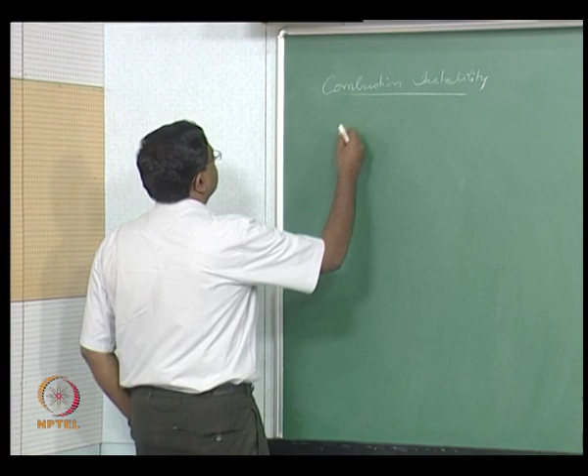The second one is combustor instability, and the third is system instability.

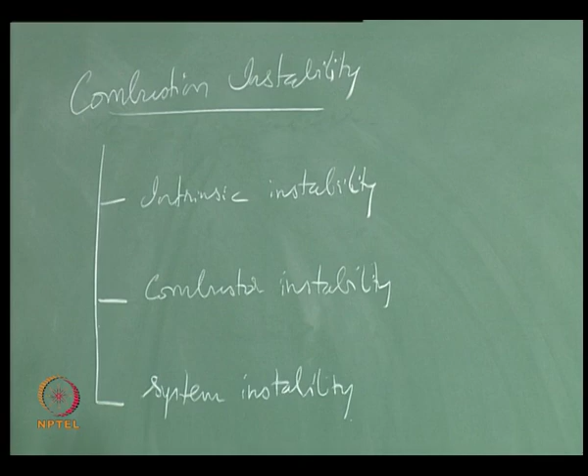We will first briefly look at what these individually mean, and then we will start looking at the details of each of these. But before that, we should also first look at the word instability regardless of combustion.

The idea of instability is not specific to combustion. It's something that comes from what we call perturbation theory. Essentially it's an idea, though of course much more than that - I think it's a much more commonsensical idea. There are lots of things around us which show inherent characteristics of instability.

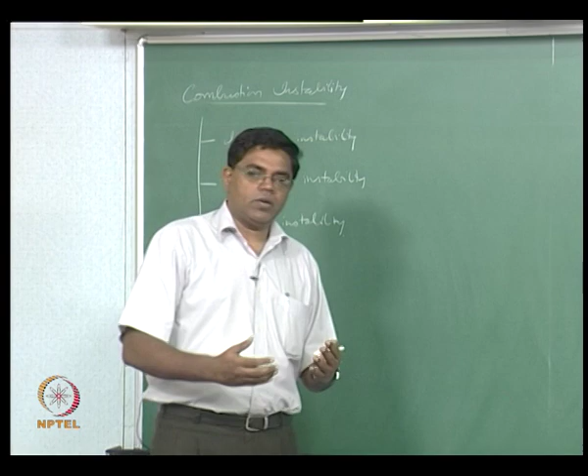Some extreme social examples would be like, for example, if I don't exercise, I grow heavier, and then that makes it more difficult for me to exercise, and then I keep growing heavier - that's an instability. Or another example: if people stop using public transport, then public transport runs in losses, so they run fewer buses, and therefore we go even further away from using public transport, the buses stop running, and so on. So lots of such social or human situations go through what's called instability.

So the basic idea is, if you have a system which we think is in equilibrium, and then we try to make a small perturbation, the question is: does the system come back to the original position, or does it go away from the original position?

There are a few different things that are important here. You could have a dynamic system which is in equilibrium locally, that means at a particular set of parameters. For example, in a flow system the parameter could be Reynolds number. In a combustion system the parameter could be equivalence ratio. So you could be running an engine at a set of conditions like airflow rate and equivalence ratio, pressure, and initial temperature of reactants, and so on.

For this set of conditions you now have some equilibrium, and what we are talking about is perturbing about an equilibrium for this given set of conditions. If you move your set of conditions, you reach a new equilibrium, and that need not necessarily be as stable as the previous one. So equilibrium doesn't necessarily mean stability - you could have an unstable equilibrium or a stable equilibrium.

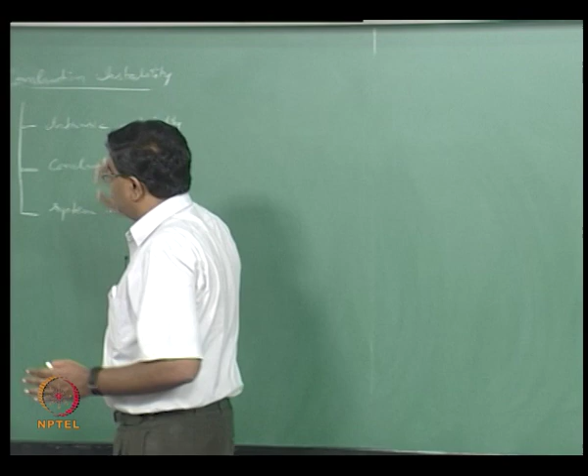Intrinsic instability then is actually an instability where you don't have anything else coupled to the combustion. It's only the combustion itself that is unstable, right? So the flame exhibits instability by itself.

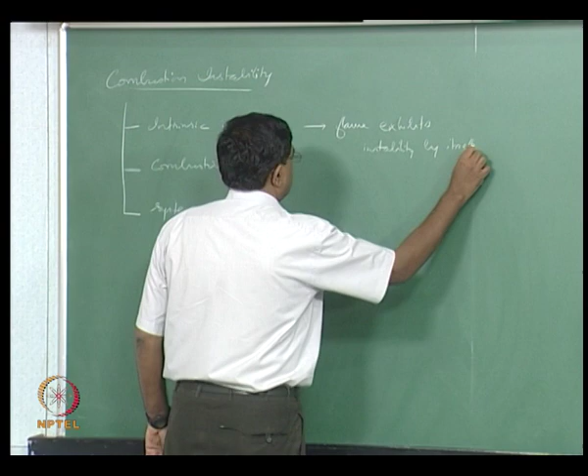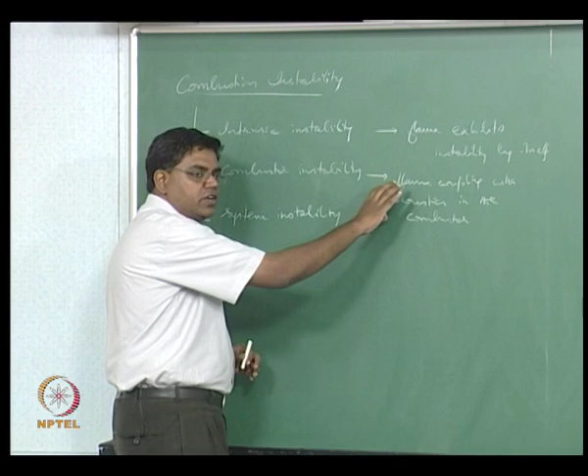A combustor instability, on the other hand, is a system of flame coupling with acoustics in the combustor - this is a flame-acoustic system where you have a feedback loop between the flame and the acoustics in the combustor. We will talk in greater detail about this, but essentially here it's not a standalone combustion that is going unstable, it's combustion coupled with acoustics in the combustion chamber that is going unstable. So that is the combustor instability.

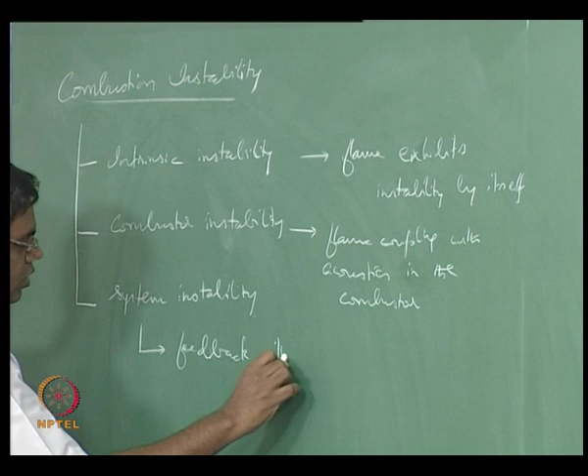The system instability is a feedback with, let's say, fuel supply, air supply, or oxidizer supply, etc. That means it's a bit more specific to how the system is actually configured, which is going to cause this instability. Again, we will talk in greater detail about this.

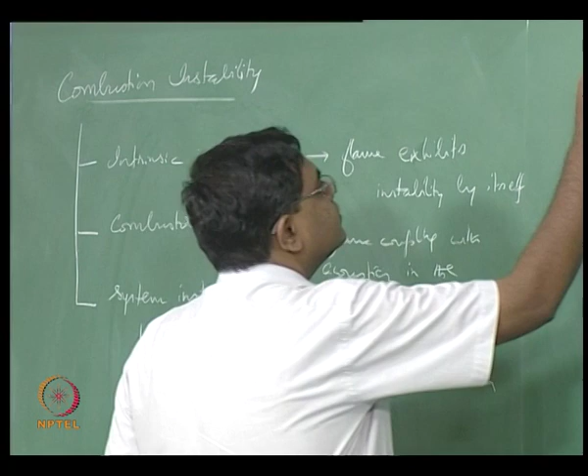So let's first talk about the intrinsic instability here. We shall talk about Premix Flames - or I should say Premixed Flames. I shouldn't say plain Premixed Flames, because that's the point of contention as far as the instability is concerned.

Let's look at Premixed Flames. We have talked about the issues involved here. We could talk about two things: one is the thermal diffusive instability, and the other one is the Darrieus-Landau instability.

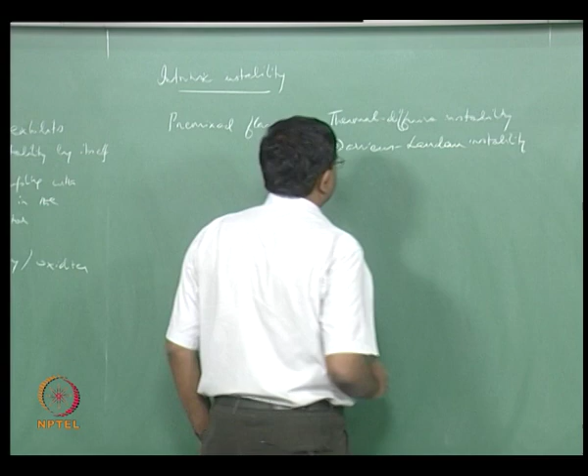We have discussed this previously when talking about corrections to the laminar flame speed, specifically the effects of flame curvature and flow divergence.

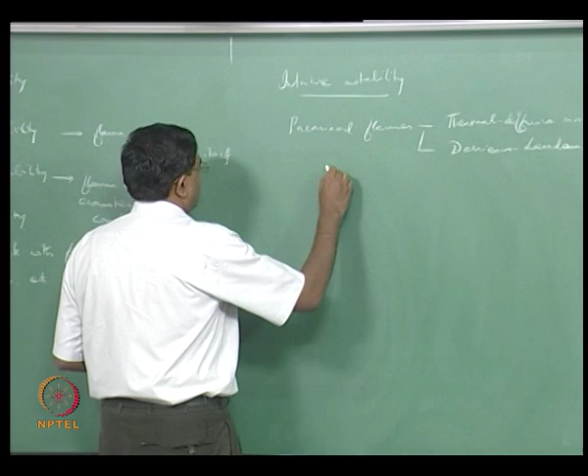Suppose you have a planar flame and then perturb it. We have the situation where heat is going radially outward in a flame that is curved concave relative to the upstream reactants. The flow is going from left to right, and in this case the heat is converging.

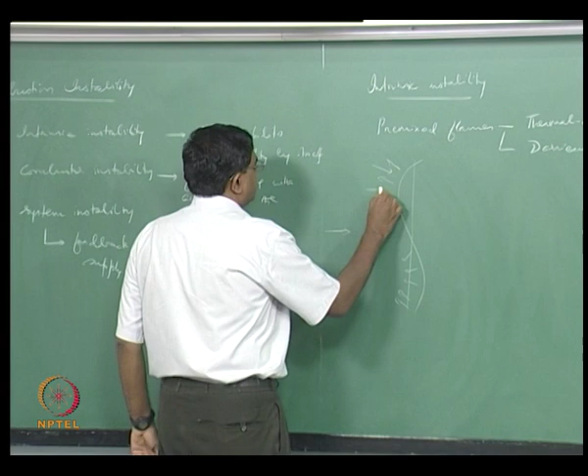While the heat is diverging here and converging here, the reactant diffusion into the flame happens in the opposite direction. That means here all the reactants are converging towards the flame, and here they are diverging.

So you have a lesser concentration of reactants in this flame, but they get heated up more. But you have a greater concentration of reactants elsewhere, but they are getting heated up less because the heat is getting distributed.

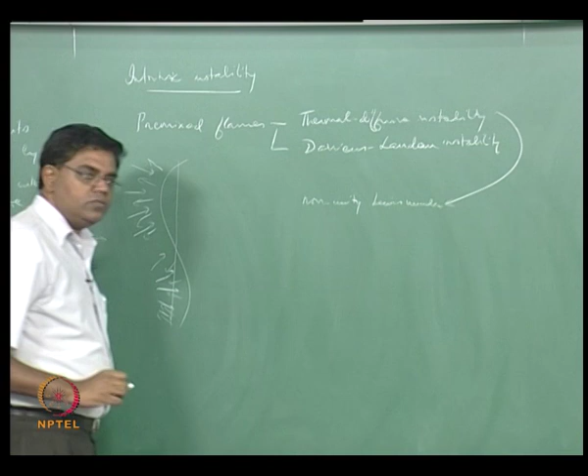So now the question comes, what is the effect of Lewis number? The thermal diffusive instability is directly a consequence of non-unity Lewis number. When you have a non-unity Lewis number, the heat conduction upstream to the reactants and the reactant diffusion downstream to the flame don't happen exactly over the same length scale.

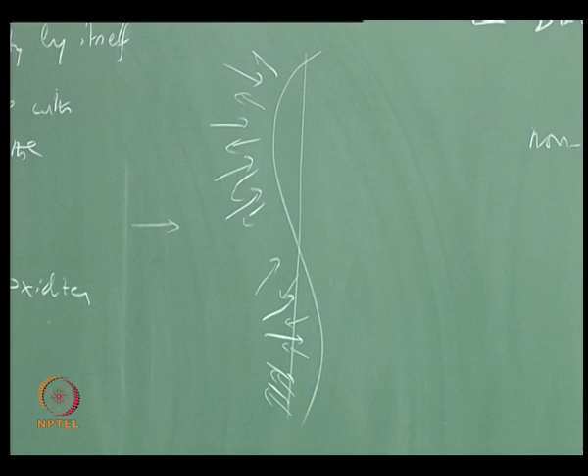We have gone through this before: when we have a larger Lewis number, the conductive effects are more compared to diffusive effects, whereas for smaller Lewis number it's the opposite. Depending upon this, there are ranges of Lewis numbers for which you will have something that is unstable.

This leads to an unstable flame, or oscillatory, or stable flame.

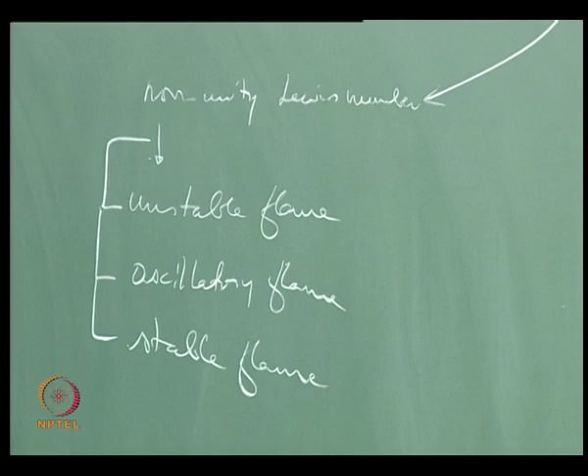What is meant by that is, going back to the idea of instability in general: if you have an equilibrium point and give it a perturbation, you track what happens to the amplitude of the perturbation with time.

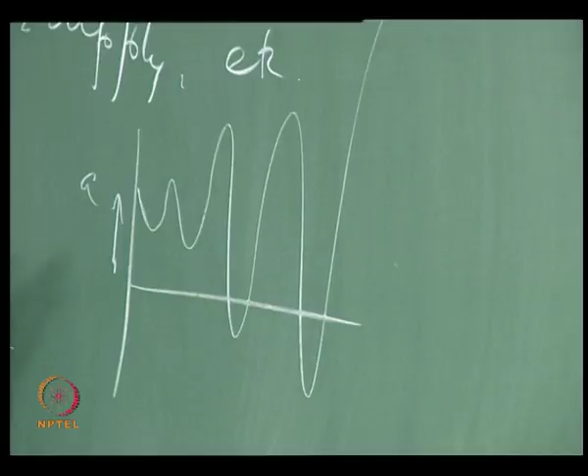The other situation is when you have something that comes back in an oscillatory manner, so this becomes stable. That means the amplitudes are dying down, but in an oscillatory manner.

So there are many such possibilities. What we are talking about here is a possibility where the amplitudes remain constant. In fact, this refers to how a pendulum behaves.

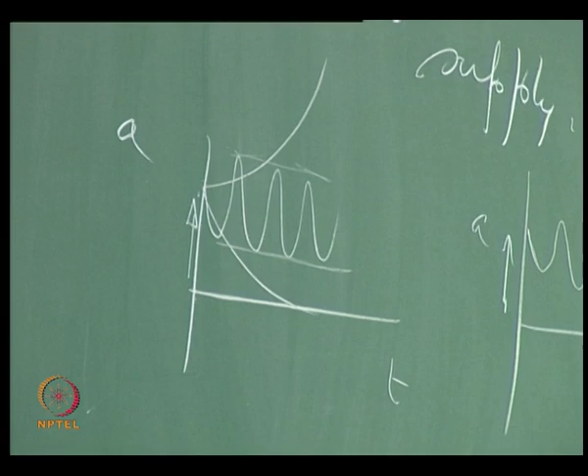When you give it a tap, it looks like it comes back, but it kind of misses the equilibrium point because of inertia, and it went to the other side. Then it goes back, and it looks like it's going to be stable, but it went to the other side, and so on.

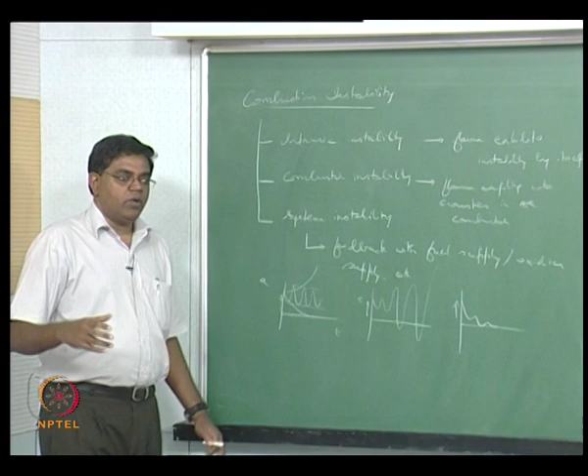Since you look at a displacement with a small perturbation, it looks like it's coming back, so you tend to think it is stable, but that is what is called only static stability. Dynamically, it actually attains a neutral equilibrium of an oscillatory state.

In nonlinear dynamics they would refer to it as a Hopf bifurcation and so on, but we will not get into all that jargon here.

We will just say that, for example, you could lead to an unstable flame. That means when you have a planar premixed flame that is perturbed, it could become increasingly non-planar. So if it starts getting curved more and more, that's an unstable flame.

A stable flame, on the other hand, is where you have a perturbation and then it gets back to being planar. An oscillatory flame is one that starts oscillating with a certain constant amplitude. So there are many such possibilities.

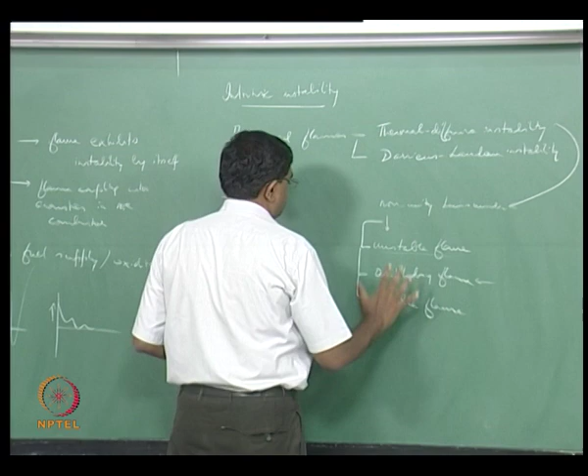In fact, the oscillatory flame is something I'll talk about more in the context of partially premixed flames. But right now you could say that for different Lewis numbers, the flame becomes unstable or stable.

Typically the Lewis number is a function of the reactant, since it involves the diffusivity of the reactant. So usually we are talking about non-unity Lewis numbers of the deficient reactant, because the deficient reactant is the one that the flame is more sensitive to.

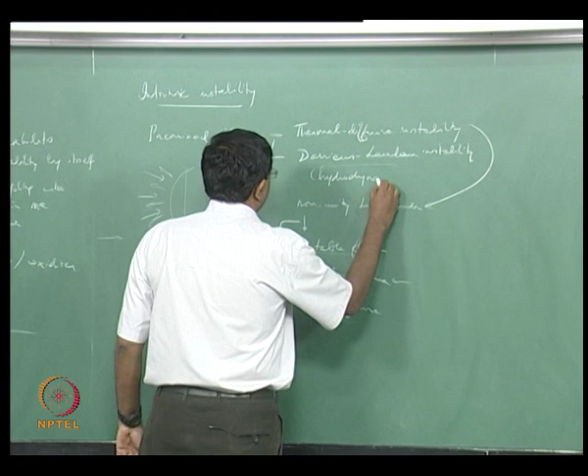The other kind of instability we are talking about is called the Darrieus-Landau instability, or hydrodynamic instability. This is something we discussed in the context of corrections to the laminar flame speed in a steady state framework, not necessarily in an instability framework, where a premix flame can be thought of as a line of discontinuity between two regions of different density. You have the cold, denser reactants, and the hot, lighter products. Because of this you get a flow divergence or convergence behind the flame, which could accentuate the curvature.

So the basic idea about the Darrieus-Landau instability is that if you have any interface between two fluids of different densities, it is inherently unstable, intrinsically unstable, or unconditionally unstable. That's the kind of mechanism that prevails in flames as well.

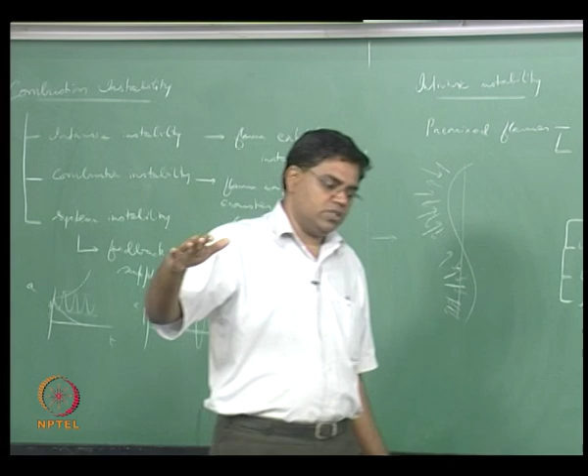A similar example is a surface of water with air on the other side. You now have two fluids of different densities separated by an interface. This interface is susceptible to perturbation, and when this perturbation happens it starts forming waves. Similarly, flames are actually interfaces between fluids of two different densities, colder denser reactants and hotter lighter products, so you would face hydrodynamic instability as well.

In practice you have a combination of both, so it is not unrealistic to expect planar premix flames in the laboratory, not because they are both thermal-diffusively stable and Darrieus-Landau stable, but because although they could be unstable, those instabilities cancel each other out. One instability causes it to move away from the original position while the other tends to bring it back. So one could be destabilizing and the other stabilizing, and the stabilizing mechanism could overwhelm the unstable one, or even if both are trying to be unstable, they counteract so that you get a stable flame.

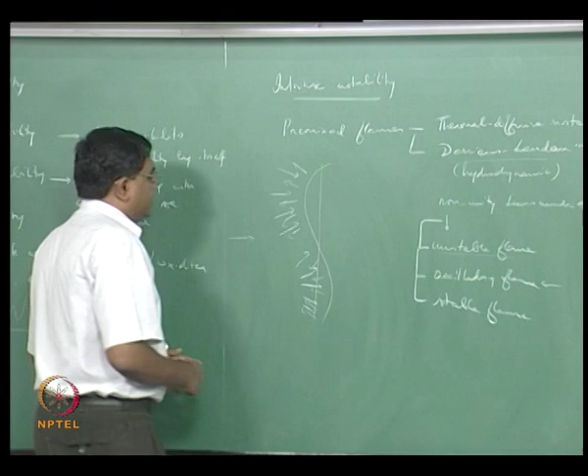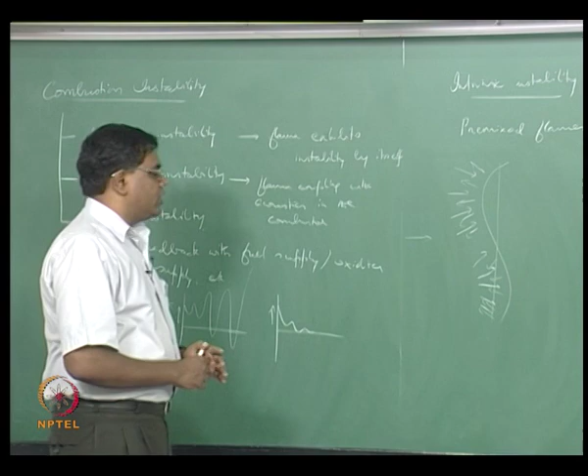This is possible. In the extreme case where you have an unstable flame and the curvature keeps growing, you get into a regime called cellular flames. The premix flame is no longer planar but breaks down into many different cells, reaching a new stable equilibrium where it exists as these cells. That kind of flame structure is what is called a cellular flame.

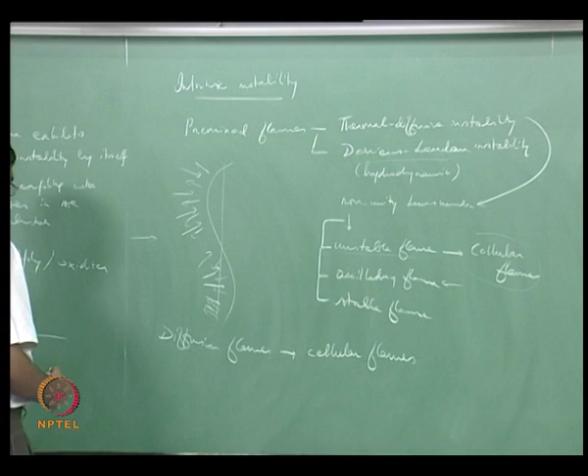A cellular flame structure is also observed for diffusion flames—this is diffusion flame instability. So you can also expect cellular flames under some conditions for diffusion flames. In fact, thermal diffusive instability is predominant in diffusion flames because you expect diffusion effects to be important there. Darrieus-Landau instability is not as common because you don't see the density jump happening as much as in a premix flame. So premix flames are more susceptible to that, but in reality, with a non-unity Lewis number and density varying with temperature, you can expect both mechanisms to prevail to different extents.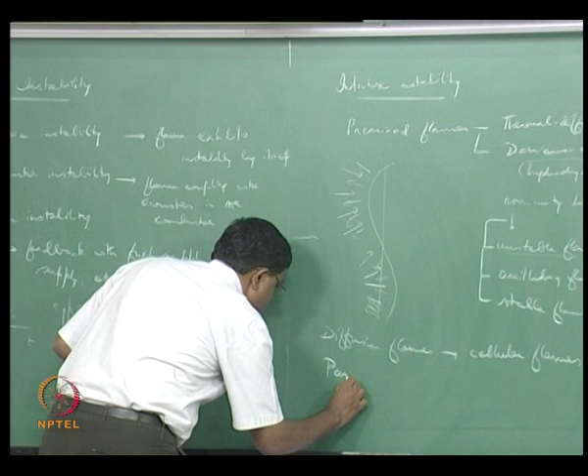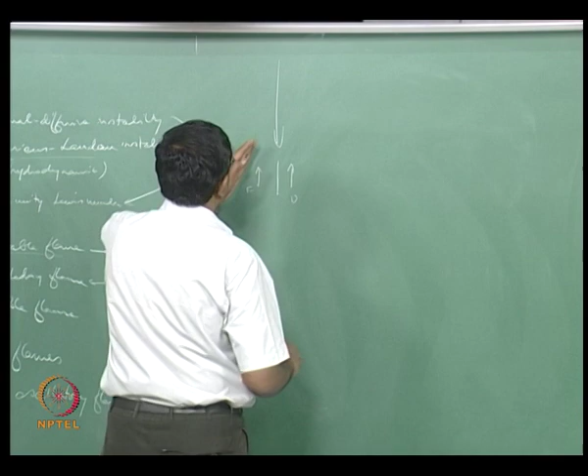Then finally we have the situation of partially premixed flames. Here there are some regimes of Lewis number greater than 1 where you get oscillatory flame behavior—something like a triple flame, or something more compact, essentially an edge flame. If you look at a triple flame like this with a splitter plate, fuel on one side, oxidizer on the other, you have a trailing diffusion flame with a fuel-rich branch and a fuel-lean branch. There are some Lewis numbers for which this entire structure begins to oscillate back and forth at a constant amplitude. Of course, if you change the Lewis number or the Damkohler number, the Damkohler number dictates how much the standoff distance should be.

The Damkohler number is effectively an indicator of the finiteness of the chemical reaction rates. The more finite the chemical reaction rates are, or the less close to infinite chemistry, the more finite the Damkohler number, and correspondingly the standoff distance increases. Even under stable conditions, you will not get an established equilibrium flame below a certain Damkohler number, and the flame blows off. That is the steady state.

There is a steady state solution that doesn't exist. Now for a steady state solution that exists, this is susceptible to small perturbations for some Lewis numbers greater than 1, where it actually undergoes oscillatory instability.

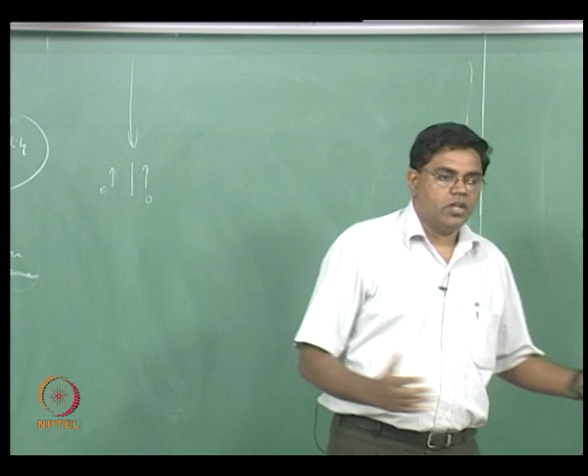That is the case we were talking about, a constant amplitude, and of course the amplitude and the frequency are functions of Lewis number and Damkohler number, and they change continuously. You can also think about the fuel oxidizer ratio and concentration gradients that the flame is subjected to. So these are the parameters over which the oscillatory instability will manifest.

So that's about intrinsic flame instabilities. Now let's look at combustor instabilities.

Here basically what's happening is, if you now have a flame that is being perturbed, the basic thing we are looking at is what's happening to its properties. These properties mainly in this context could be the heat release rate, the temperature downstream of the flame, and the density downstream of the flame. Of course all these things are related - the temperature rise is related to how much heat release there is, and the density fall is related to the temperature rise.

So if you now perturb the flame and the flame moves around, the heat release rate undergoes a fluctuation, and therefore the temperature undergoes a fluctuation, and the density undergoes a fluctuation. When you now have these fluctuations, they set out acoustic waves away from the flame, and these acoustic waves will now go and get reflected at the ends of the combustor.

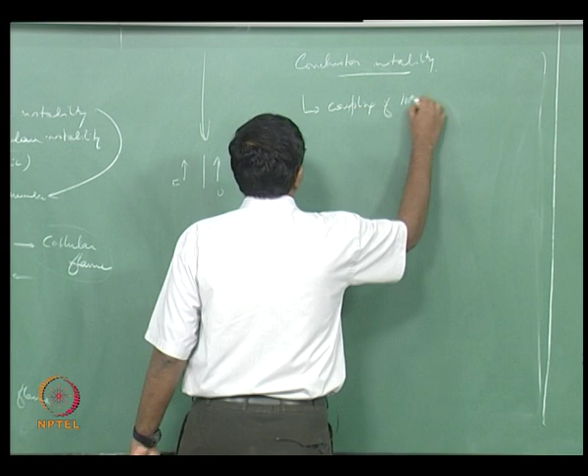Of course before I proceed further, what I should say is, the situation I just described is something that is very simple to think about for a gas phase combustion. That means you now have a gaseous reactant - gaseous fuel mixing with gaseous oxidizer, maybe a premix flame, maybe a diffusion flame - but essentially some gas phase flame that is undergoing this and causing this situation.

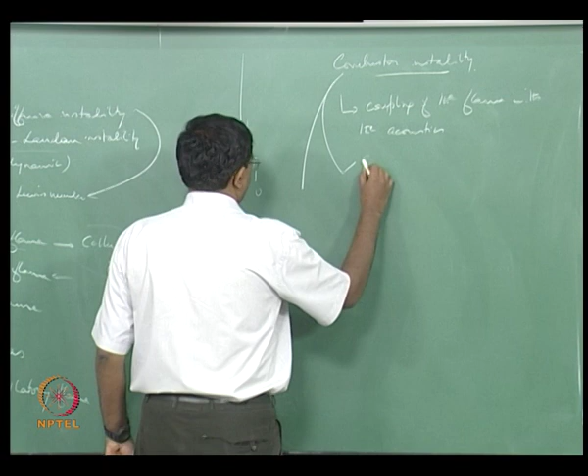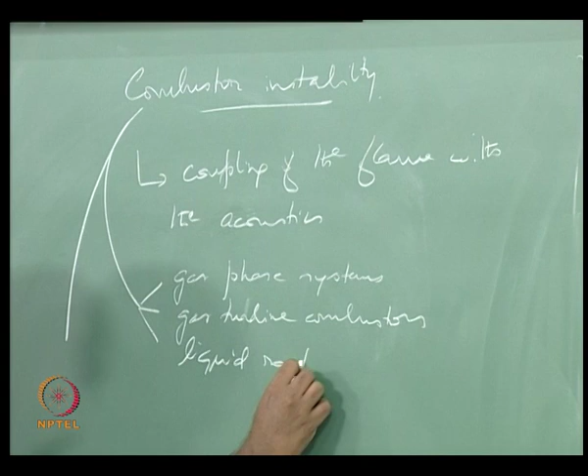But before we proceed, I also should point out that there are two ways of thinking about this depending upon what we are dealing with. On the one hand, you could now deal with gas phase systems - gas turbine combustors. Gas turbine combustors could be gas phase systems or liquid phase systems. There are land based gas turbines which use natural gas for powering them, or aviation gas turbines which use liquid fuels, so you could have liquid fuel as well in these, and then you can also talk about liquid rocket engines, liquid rocket combustors, and so on.

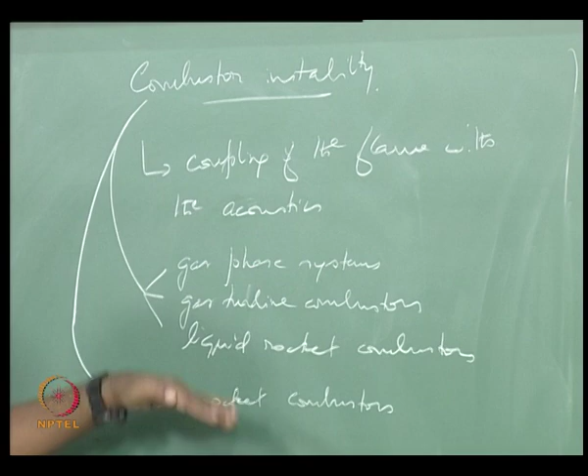But on the other hand, you now also have solid rocket combustors, and the way things happen in a solid rocket are slightly different from the way it happens in these. So we will first discuss what happens over here, and then we will go back and look at what happens here. So let's look at gas phase combustion, for example.

Gas phase combustors could have, of course - many times we are interested in gas phase combustors having premix flames. So you could think about a combustor in which, let us say, a typical geometry for us could be - what's a very simple geometry, a simple geometry for us as far as premix flames is concerned.

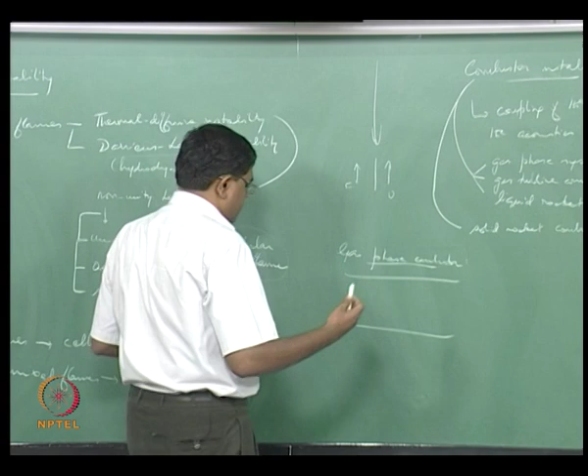Let us suppose that we now take a V gutter. If you now take a V gutter, we would like to think that you can have a flame established like that, anchored at the edge of the bluff body, and then it actually extends out. We talked about this when we were dealing with flame shapes - the flame is trying to propagate with a turbulent velocity, and it orients itself so that the local normal velocity component matches the turbulent flame speed, and so on.

But then the question is, what happens when the flow velocity begins to oscillate on top of a mean flow? So you have a mean flow, but it's now going to go back and forth. So why does the flow velocity oscillate?

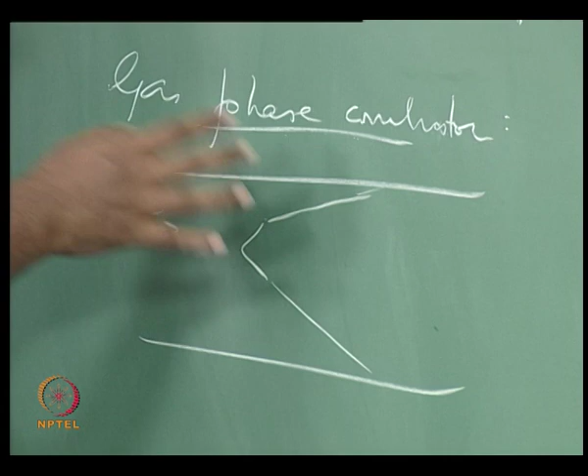To start your thinking on the loop, let us suppose there is a perturbation, and we want to point out that this is going to give rise to more flow fluctuation. So when you now have a flow velocity fluctuation, you have a faster flow sometime and a slower flow sometime. When you have a faster flow, the flame gets more inclined, and when you have a slower flow, the flame tries to propagate still further in, so it goes like that.

So essentially now we think the flame is going to flap back and forth like this. When the flame flaps back and forth, look at what's happening to the flame area - it keeps fluctuating. Since the flame area is along which the heat release is happening, the total heat release in this region is going to fluctuate, because you had a larger area over which heat was released versus a smaller area, and therefore you're going to get heat release fluctuations because of the velocity fluctuations.

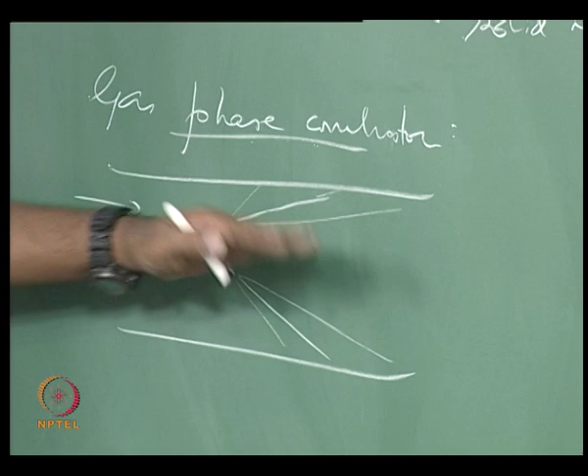And the heat release fluctuations now try to send out acoustic waves that amplify this oscillation, and when the oscillation gets amplified further, it's going to become wilder. So that's the instability we were talking about.

But unfortunately, life is not as simple as this. So what happens in reality is, when you're now trying to send this fluctuation, the flame simply doesn't move back and forth like this. Instead, it actually moves more like that.

There is a perturbation that happens in bulk for the flow, which the flame tries to match, but there is also the perturbation that is being sent along the flame. So there are two ways in which this perturbation is propagating - one from the boundary along the flame, and one in the flow field itself.

So depending upon how long the flame is locally, the wave propagating along the flame starting from the boundary, and the flow fluctuation happening anywhere at any part locally on the flame, they are going to interfere constructively or destructively, and depending upon that, you are now going to get a wavy pattern.

This now adds further to the flame area fluctuations, and on top of it we have to consider, now that you have a non-planar flame, the flame curvature effects and the flow divergence effects on the flame propagation speed.

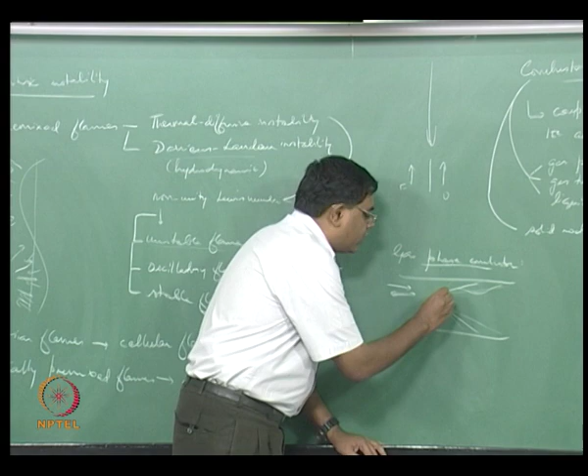Okay, so there are all these other things, and in reality the other problem that happens is the flame anchor point, where it is actually being held at the flame holder, that itself fluctuates, because at the anchor point we went through this dynamics. You now have an entrainment of non-reacting gases on the one hand and a heat loss on the other, and this heat loss begins to fluctuate, the entrainment begins to fluctuate. So where exactly the flame stands away from the burner, that fluctuates.

And that is where the perturbation is being sent along the flame. So if the flame itself were to move away and then you send a fluctuation along the flame to constructively or destructively interfere with the bulk flow fluctuation, then the flame shape gets altered correspondingly. So these things actually complicate this matter.

This is purely what we call a kinematic effect. The moment we are talking about the flame speed and a flame sheet, and the flame is trying to balance the flow, that kind of idea, all the dynamics is considered within the flame. We have long gone past the point where we have to worry about the dynamics of the energy balance and the species balance and so on that happens within the structure of the flame. We only worry about how the shape changes now. So this is not even dynamics, it is purely kinematical effects.

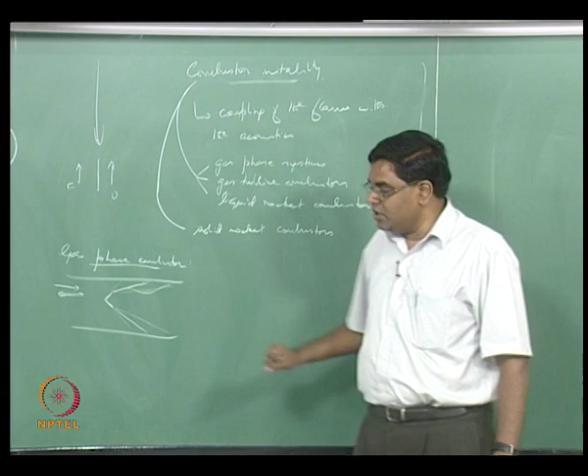So these are some of the things that happen in the case of, let us say, premix flames. Similar things also happen in diffusion flames, except that we do not really talk too much about it.

So let us suppose you now had a simplified gas turbine construct where you try to have a flame that goes like this, and then you adopt a Burke-Schumann approach to strictly get a diffusion flame, because if you did not adopt a Burke-Schumann approach where you had a flame sheet assumption - where the flame sheet is coincident with the stoichiometric surface and so on, all the ideas that we had - then we will have a flame standoff.

You will have partially premixed flames that look more like this. That's what happens in reality, but for the sake of thinking about diffusion flames, let us think about a Burke-Schumann flame, and suppose you now have an overventilated Burke-Schumann flame.

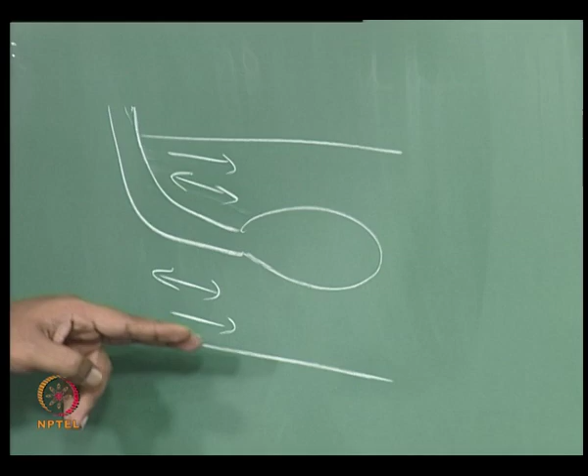Now let us suppose that we oscillate the flow on top of a mean flow. The mean flow was the one that gave rise to this flame shape, but the moment you oscillate this flow, what would you expect?

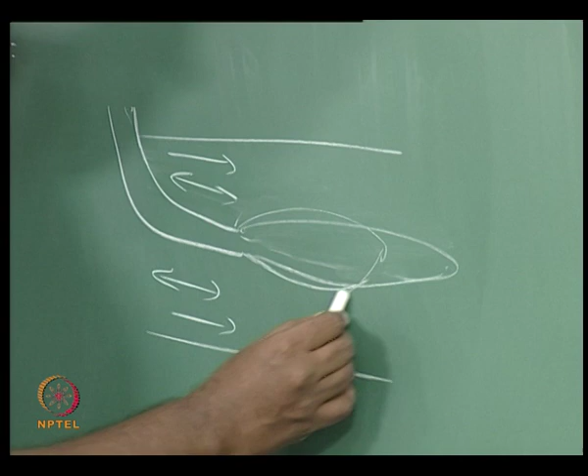The first order effect, as we saw earlier, is if you temporarily have a flow that is going faster, it should actually prolong the flame, and for the other half of the cycle where the flow goes slower, it should now shorten the flame.

So the flame shape should now begin to change like this, and therefore the flame area fluctuates again, and the heat release is happening along the flame sheet. Very similar ideas to what we just talked about for the premix flame exist here.

So we could think like that, but that is a more simplistic idea. What in reality happens is like what we talked about, meaning you also have a wavy structure that goes on for this flame, depending upon the frequency and length scale of the flame, and you have to factor that into account.

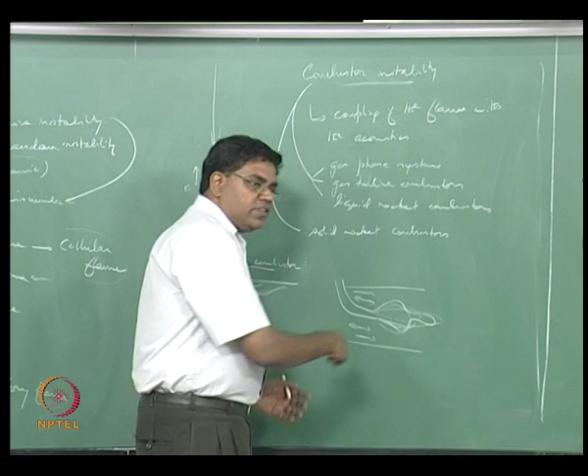So typically what we are interested in is what is the heat release fluctuation as a ratio of the mean heat release, for a given velocity fluctuation as a ratio of the mean velocity. So you have now two things: heat release fluctuation over mean heat release, divided by velocity fluctuation over mean velocity.

This quantity is typically referred to as the flame transfer function, and there is a lot of work that's been going on in these things. Essentially we are looking at what is the flame response to the oscillations, and what we understand in the gas phase flame context is these oscillations are essentially happening because of velocity fluctuations.

So you don't expect a big effect from pressure fluctuations that are associated with acoustic waves. It's the velocity fluctuations that are causing the havoc.

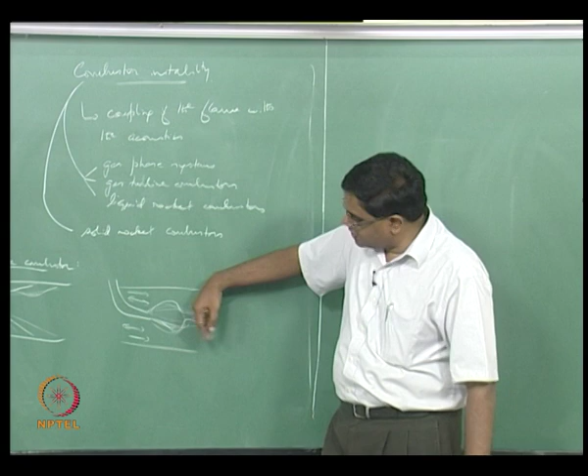So a quick fix for you would be, if you find there are huge oscillations happening, is it possible for me to locate where the flame exists - the bluff body here, or the fuel injection point here - in a place where I have what's called a velocity node in the standing wave mode.

So you have a standing wave, and you have velocity nodes. Try to locate the flames there so that the flames are more silent - they are not really subjected to huge velocity fluctuations no matter what the amplitude is, because regardless of the amplitude of the perturbation, the node is going to always have a zero velocity amplitude.

So if you now try to locate your flames closer to the nodes, of course the point is the presence of the flame itself changes the acoustic mode shape. So you have to actually dynamically chase the velocity node and then locate it. It's a little bit more involved than just saying that.

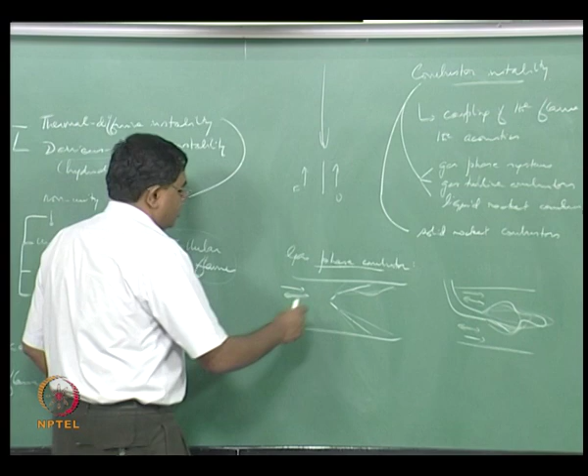And similarly, there are other problems - one of the things I have not talked about here is, if you now have a bluff body, you have vortex shedding associated with it, and the vortex begins to curl the flame, and that increases or decreases the flame area, and these vortices are shed.

So when the vortices are shed, they take away a part of the flame and burn it somewhere there, and then a new flame is established, and so on. So you now have heat release oscillations associated with vortex shedding.

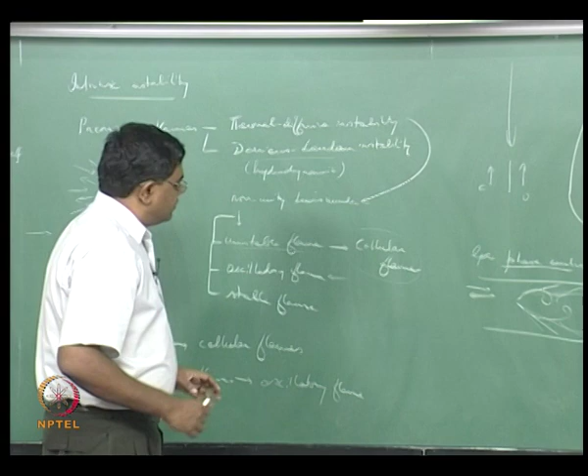And now you have a new time scale in the problem related to the vortex shedding frequency, and how this vortex shedding frequency relates with the natural acoustic mode of the duct satisfying the acoustic boundary conditions will also play a huge role in dictating what the acoustic amplitudes are, and the amplitudes of the other fluctuations. So this is now getting quite complicated.

In the solid rockets, on the other hand, you have a very different situation. What you have is, if you think about a solid rocket, obviously we are talking about combustion chambers, so combustor instabilities.

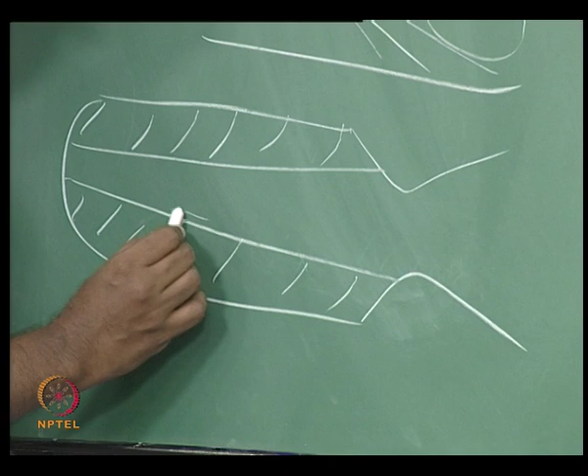So we have to look at a solid rocket motor, in which if you have a propellant shaped like this, everything that matters happens within a very short distance from the burning surface of the propellant. If you think about this region, we talked about a homogeneous propellant which has a premix flame, or a heterogeneous propellant where you have oxidizer particles, a diffusion flame, maybe an edge flame here, and a monopropellant flame there.

The question is, what is the effect of the acoustic oscillations in this chamber on this flame? Typically the way solid propellant rocket design is done is to look at how the burning rate of the propellant depends on pressure.

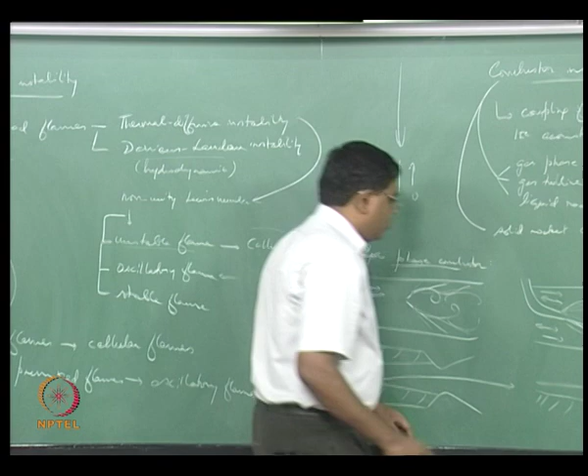Usually you get a picture that looks like R goes as P, like that, and this is actually a log plot.

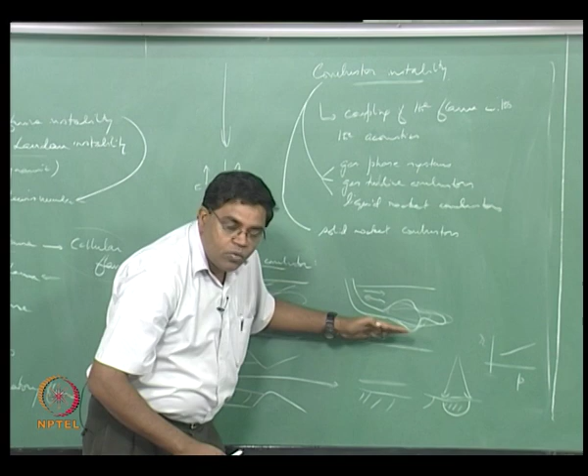What we are talking about is, if I increase my pressure, the reaction rates should increase, so the flames get attached closer to the surface, sending more heat to the burning surface and giving rise to more gases coming out. So as the pressure locally increases, the rate at which gases come out should increase, meaning the instantaneous burning rate increases, putting more gas into the chamber and pressurizing the system more.

When you have less pressure because of an acoustic perturbation, the burning slows down and puts less gas into the chamber, relieving this, and the pressure decreases further. So when you have an oscillatory pressure, the way the propellant burns most of the time helps the pressure to increase and decrease more and more.

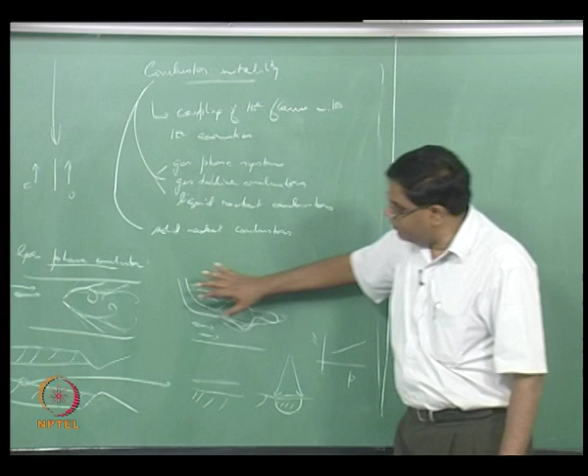So instead of looking at a velocity fluctuation based flame response as we did in the gas phase combustor, here we look at a pressure based propellant combustion response. We can think about a response function, but this is not in terms of heat release fluctuations and velocity fluctuations, it's in terms of mass fluctuations relative to pressure fluctuations. So the characteristic we use to look at how the propellant responds to the acoustics is slightly different from how we deal with in this class of problems.

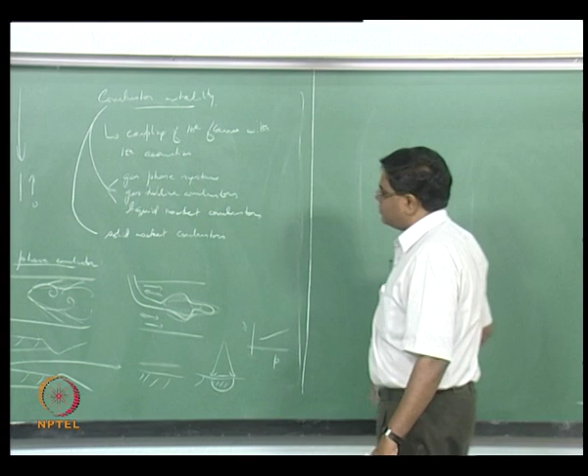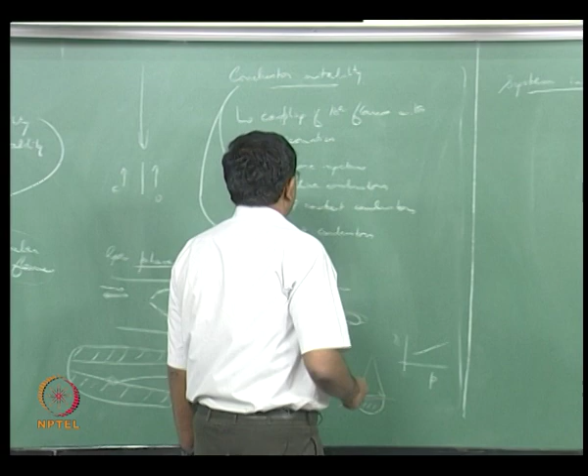Finally, let's look at system instability. This again is not directly related to combustion, but it affects combustion. This is mainly seen in gas turbines and liquid rockets, particularly gas-based gas turbines. For liquid rockets, you can say fuel or propellant, both together you are looking at the feed system.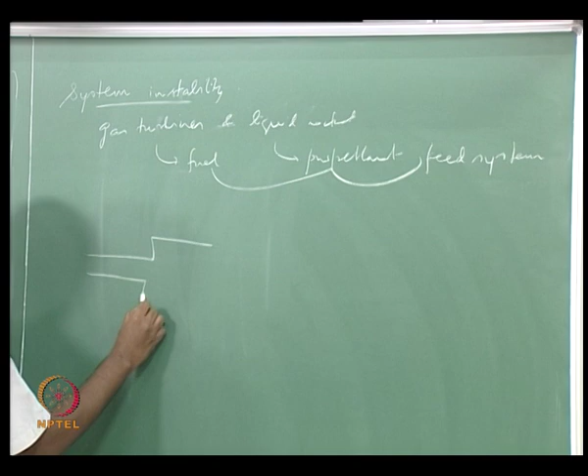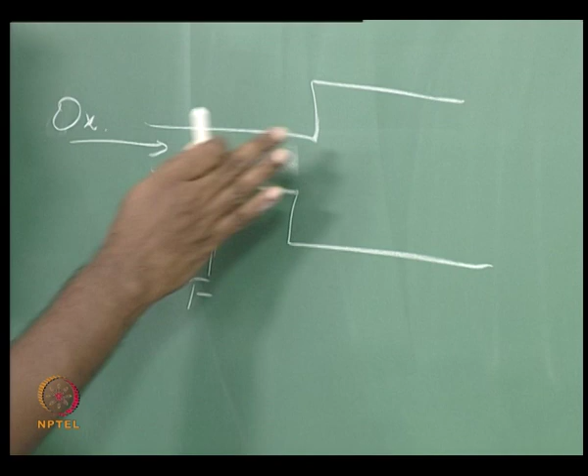The simplest example we can think of is a situation where we have air or oxidizer coming in, and you inject your fuel on the side, so in this region the fuel and air mix with each other, and then you have a premix flame that is set up there.

What we are saying is, if we have a perturbation, this flame perturbs and gives rise to heat release fluctuations, which sets up an acoustic wave. So you have an acoustic standing wave from here to there, taking into account a step change that is possible.

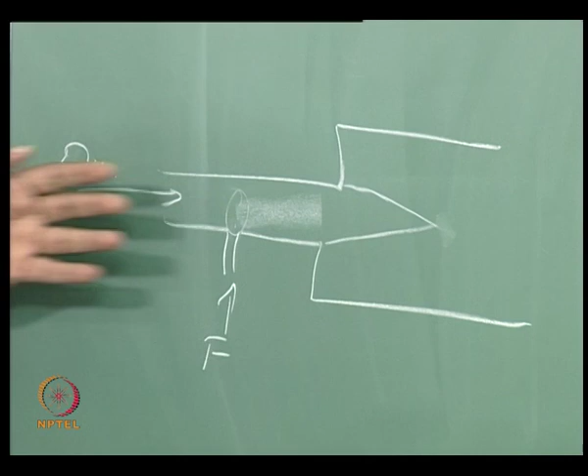In this acoustic mode where the fuel inlet is located, the pressure here fluctuates because of the acoustics, and when the pressure fluctuates you have a delta P fluctuation for the fuel inlet, which corresponds to a fuel mass flow rate fluctuation. So when your fuel mass flow rate fluctuates for a given constant mass flow rate of air, you get what's called equivalence ratio fluctuations, leading to something called phi prime.

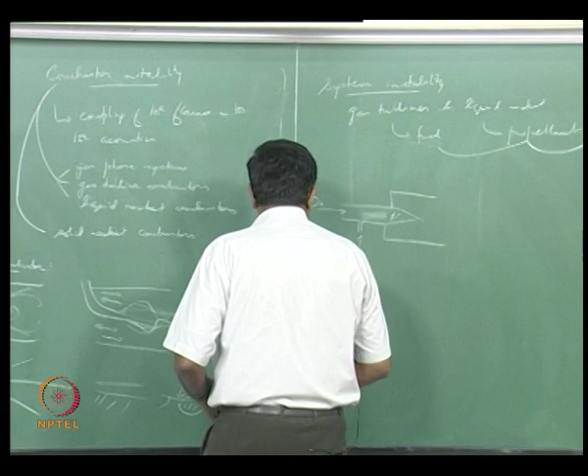We are not even talking about the effect of u prime, the velocity fluctuations, we are talking about the effect of the equivalence ratio fluctuations. So for one half of the cycle where the pressure is increasing, you have less fuel coming in, so this is slightly leaner than the design point. When it is leaner, the flame burns slower, therefore it elongates.

But then in the next half of the cycle where the pressure decreases, you have more fuel coming in that mixes with the air. But the crucial thing is, it is not instantaneous mixing everywhere in the flow field at this inlet, so you have a fuel pocket that convects downstream at the flow speed.

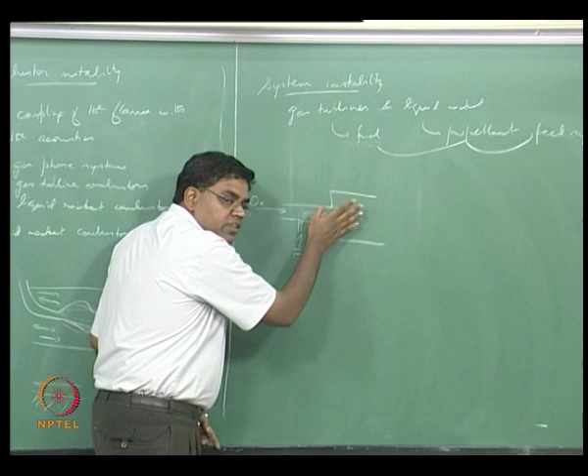So the question is, when the flame is trying to come back, if you now have a fuel pocket that arrives there mixed with air and makes it less lean, then the flame will want to come back more. That accentuates the instability. So when we say the fuel pocket comes here, that has to do with the distance relative to the velocity.

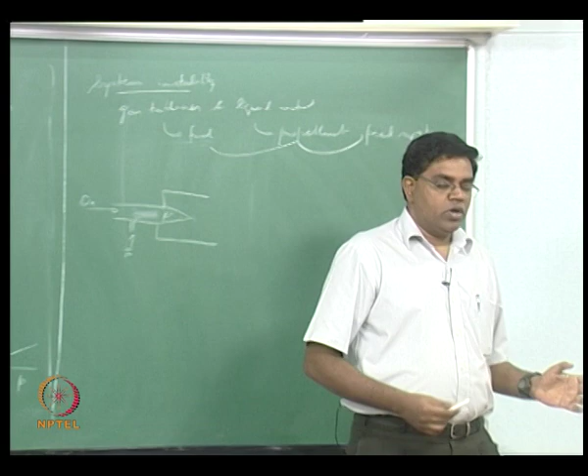So there is a convective time delay for pockets of fuel to mix with air and arrive. The equivalence ratio fluctuates because of this convective time delay, and that can feed back into how the flame flaps back and forth, changes its area, and couples with the combustion instability because of that. Similarly, in the case of liquid rockets, typically what they do as far as design is concerned is...

In order to avoid something like this, they have an injector plate designed to take a delta P across it. The injection pressure is essentially the pressure upstream of the injector plate relative to the combustion chamber pressure. So it's a pressure differential, delta P, and the way they design this is they want this delta P to be at least about 20% of the chamber pressure.

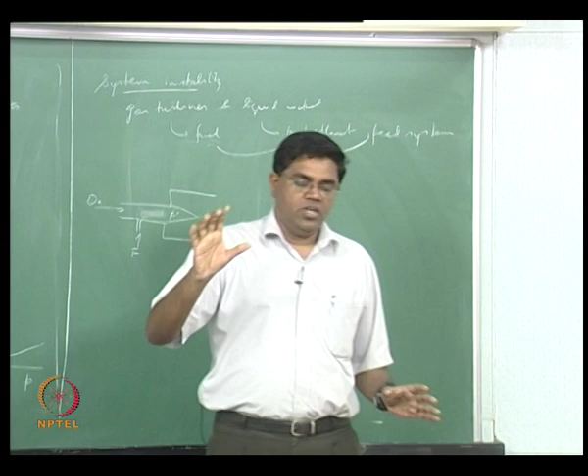That means the injection pressure upstream of the injector plate should be 20% more than the combustion chamber pressure, so much delta P, so that any oscillations happening in the combustor are not really felt upstream. You now have a fairly robust high pressure that can push the propellants at pretty much the same rate regardless of the small fluctuations there.

If this delta P were only marginally more, then any fluctuations here will propagate upstream significantly and cause fluctuations in the flow rates of the liquid fuel and liquid oxidizer, and therefore when they mix and burn, everything oscillates, and that could actually increase these oscillations even more.

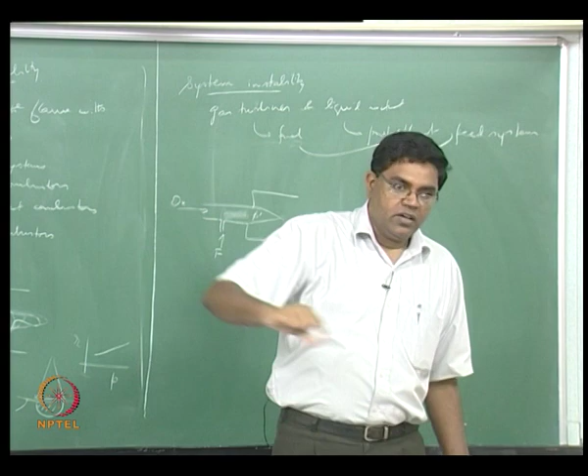In fact, many times when this is not done right, these fluctuations can actually propagate all the way upstream to the tank, where they get arrested. So now your feed line has certain acoustic characteristics. Anything that is confined has acoustic characteristics because of possible reflections and standing wave modes and so on.

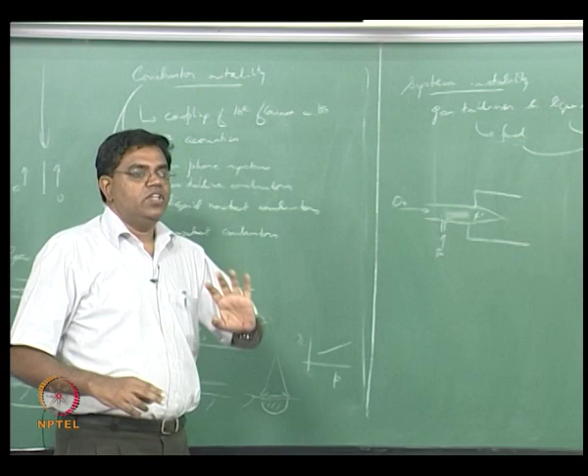So the feed line can amplify the acoustics if it resonates with the oscillations in the combustor. Many times the combustor could have what's called radial modes, whereas the feed line could have a longitudinal mode at the same frequency. When these things couple with each other, the oscillations become significant, and the whole system begins to have oscillations all over the place, telling us that system instability is a very big problem.

But of course those are getting into mechanical details, moving a little away from combustion. You have to keep in mind that the heat release fluctuations in combustion are like the primary driver for any perturbations to grow, and all other things begin to couple with it.

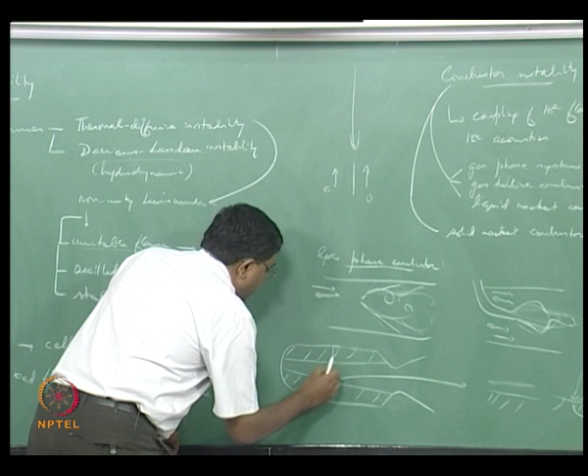Similarly, when you look at things like solid rockets, where you have segmented rockets with inhibitors, the inhibitors can protrude into the flow when the propellant burns, and produce vortices. These vortices give rise to pressure oscillations, but that is not significant many times compared to what it can do to the propellant combustion response to become significant. So this is like a trigger, and then the propellant combustion response takes over and causes the combustion instability.

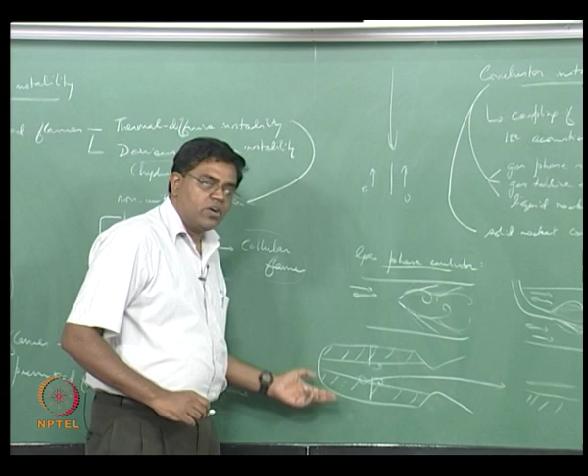So many times there are a lot of other things in the system that go together with the combustion event once it is inherently unstable or susceptible to acoustic instability. So system instability typically is a secondary effect. It's the combustion instability that we should mainly focus on trying to damp as much as we can.

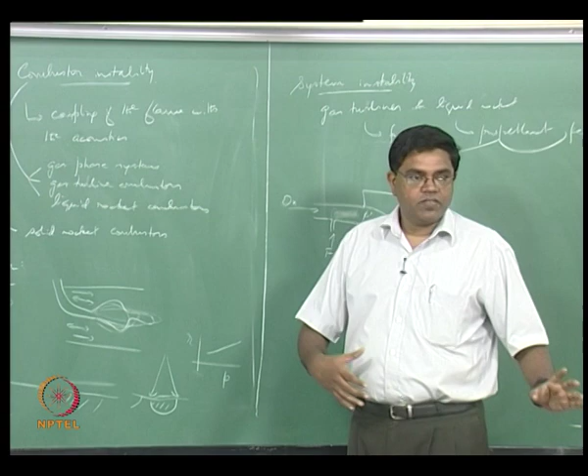We don't want to get into how to damp these things, just wanted to point out two things. One, such problems exist - things are not as steady as what we have been going through; they are inherently unsteady, or susceptible to perturbations. Second, we can understand many of these things based on what we have studied with laminar flows, laminar combustion, and steady state ideas, but the problems are a lot deeper than what meets the eye in this lecture.